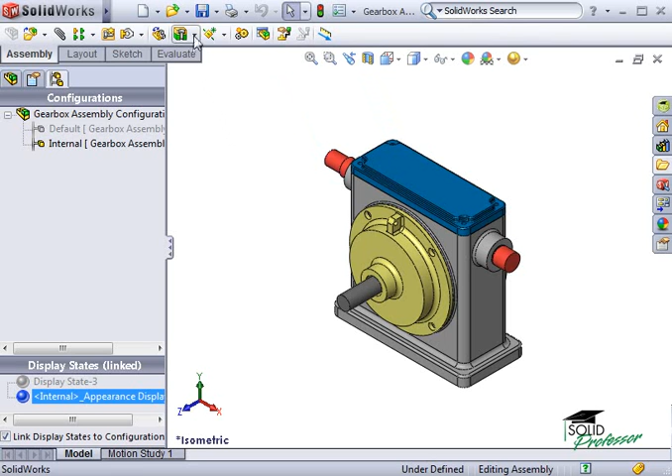Each of these options can be controlled here in this configuration without affecting the default configuration. In this example, I'll be using a combination of these options to demonstrate how each of these can be accomplished. I'll begin by creating an assembly cut. I'll select the extruded cut icon from the assembly toolbar and sketch a large rectangle.

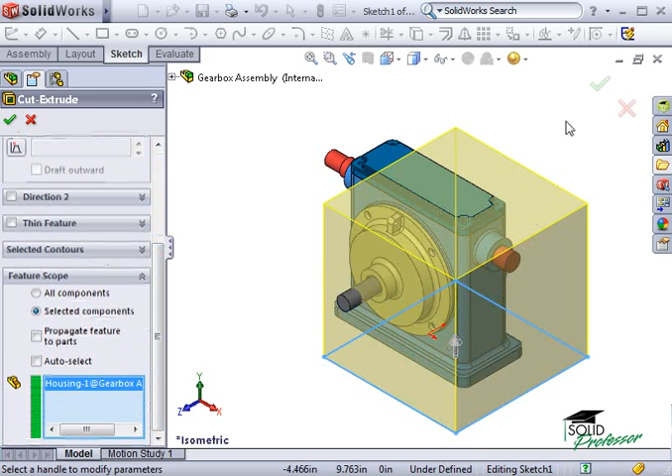I'll exit the sketch and set the end condition to Through All. Now I only want the housing affected by the cut, so I'll edit the feature scope of the cut and exclude all components except the housing. And click OK. To further reveal the internal components, I'll hide the front cover plate next. Click on it and select Hide.

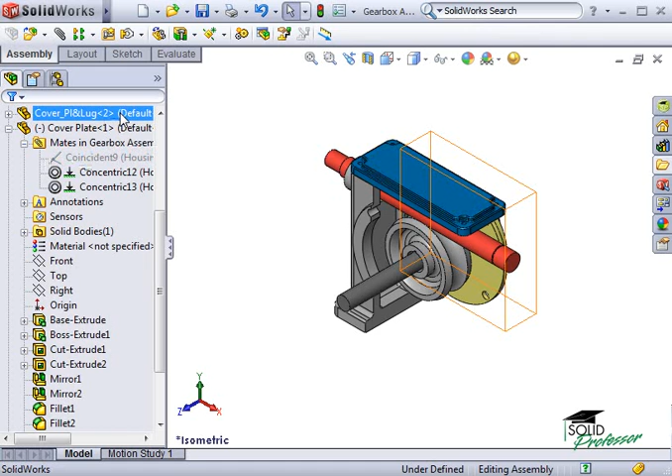And the last thing I'll do is move the cover plate. If I expand it in the Feature Manager tree, you can see there are 3 mates in the Mates folder. I'll suppress the coincident mate that's keeping the cover attached to the housing. I'll replace this mate with a distance mate that moves the cover plate up.

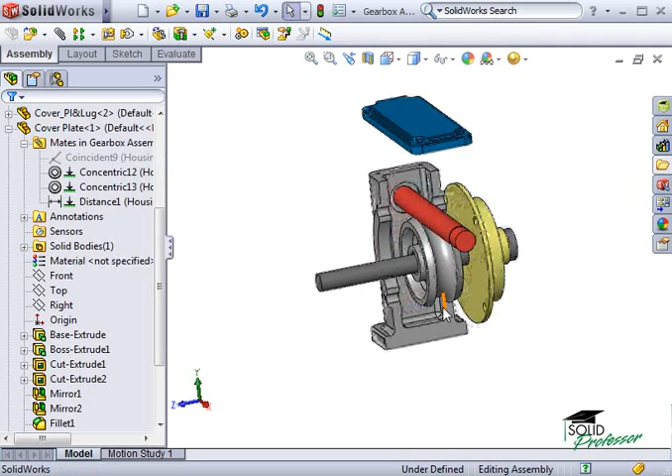Now at this point, I've made 3 major changes to this configuration. I've added an assembly cut, I've hidden a component, and I've added a new mate. Now let's go back to the Configuration Manager and activate the original default configuration. To activate a configuration, you can either double-click on it or right-click on it and select Show Configuration.

As I toggle back and forth between the two, you can see how the changes I made only affect the new internal configuration. You can add as many configurations and derived configurations as you wish. If you want to know more about the different items that can be controlled using assembly configurations, type Configurations in the SOLIDWORKS Online Help Index. A subcategory called Configurable Items in Assemblies will appear, which lists every item that can be controlled.

If you're wondering why the changes I made to the new configuration in this example, such as adding a cut and a new mate, did not affect the default configuration, your question will be answered in the next lesson.